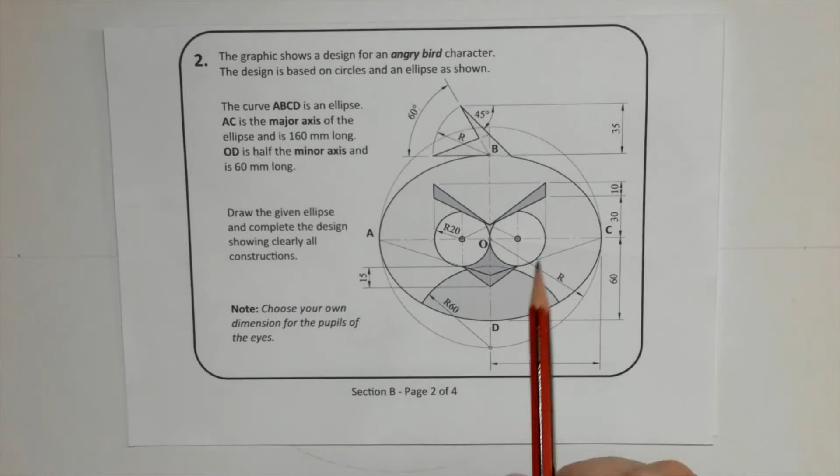It was a past exam question for the ordinary level junior cert, and it's an Angry Bird character. So already we have in this question 80 on the major axis. There we have 80 millimeters, and then 60 on the minor axis. So it's based on an ellipse. That's the way it's done.

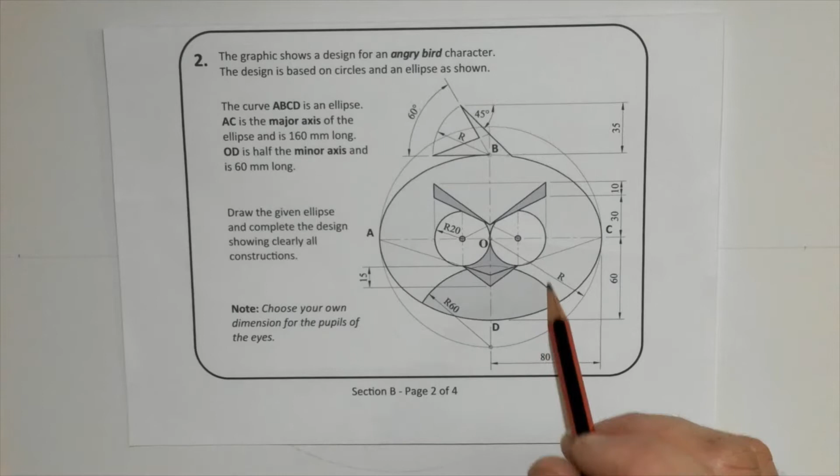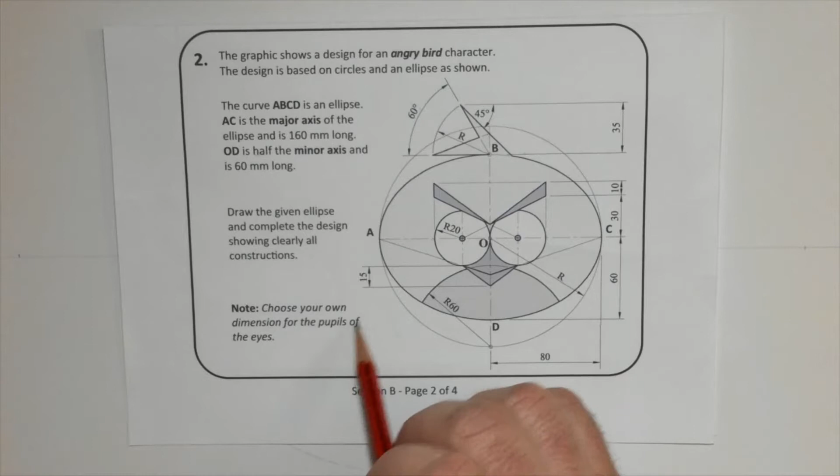There's an R60 curve here at the bottom of the ellipse. We have a 60-degree angle up here at the top and a 45-degree angle. And then it says here: draw the given ellipse and show clearly all the constructions. The pupils are your own choosing, so you can make these little circles whatever size you like. These other ones are R20, so they touch in the middle here.

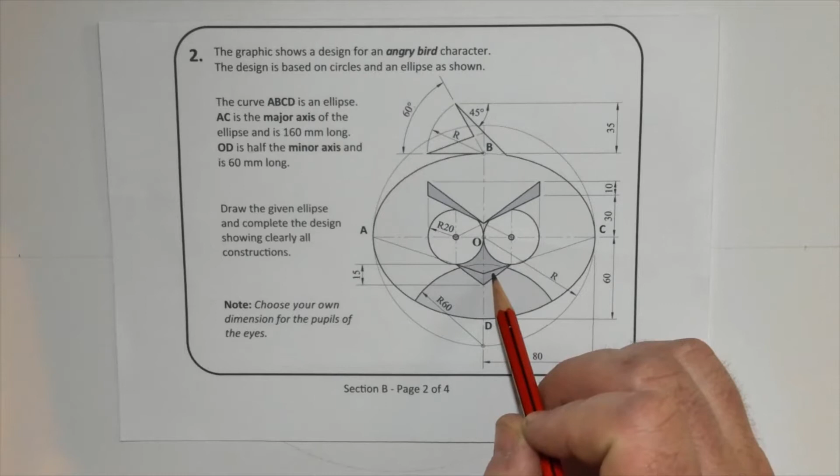But I was looking at this question. The tricky parts of this question are these two lines here. There's no dimensions on them. There's a 15 here. The 15 millimeters come from the bottom of that eye to that.

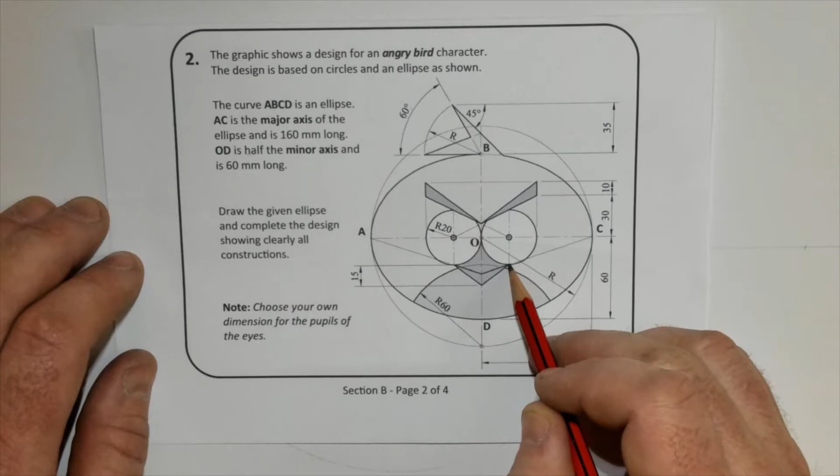So that's the 15 mil, but these ones here are a construction line which touches the outside of that circle, that cross point there, or that centre line. So it comes from there, bottom of that line restrains it, and it just touches here in the middle.

So we get going with this. With those two circles already done, we have a major circle from there to there, and then the minor circle is the inside one. So then we can just divide it up, same as normal, with the 30 and 60 degree set square.

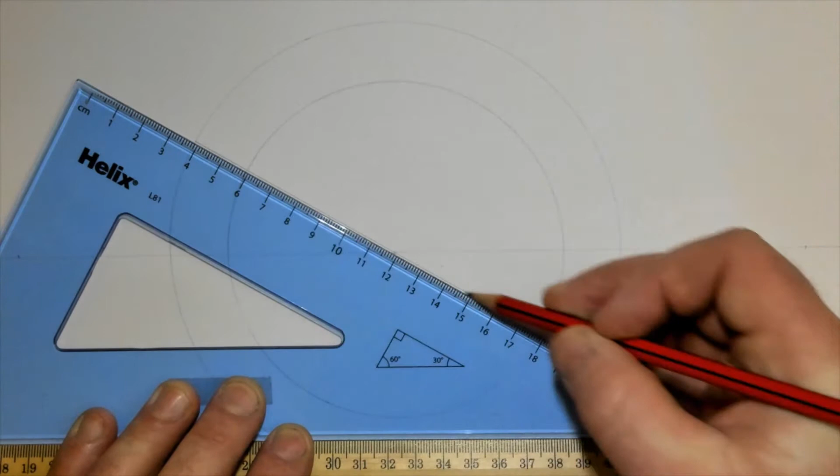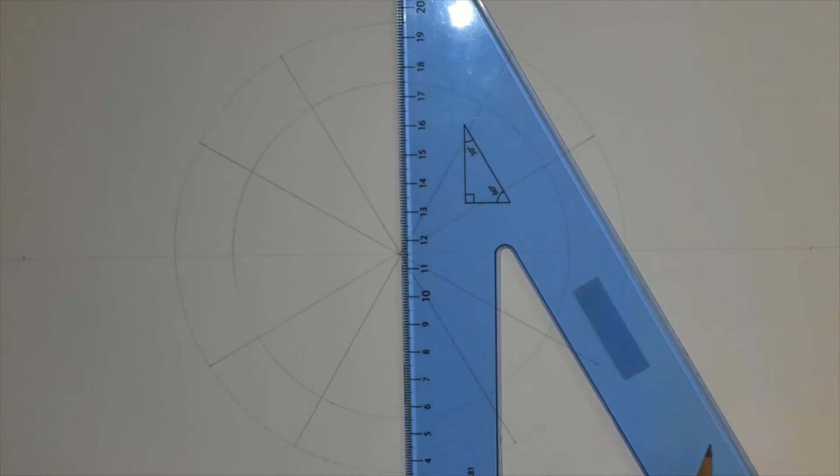So I'll do it a bit heavier here so you can see it. You don't need to go this heavy when you are doing it, just leave it a bit lighter. This is just so you can see what's going on through the camera. That line there can be maybe dotted, just stop and start it.

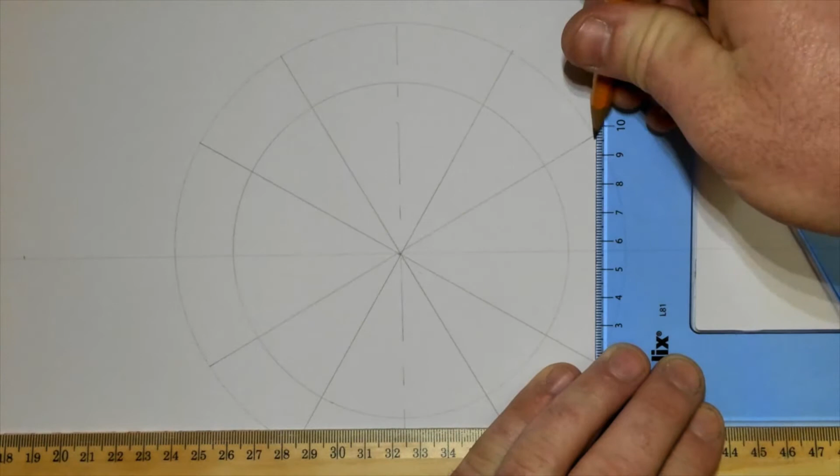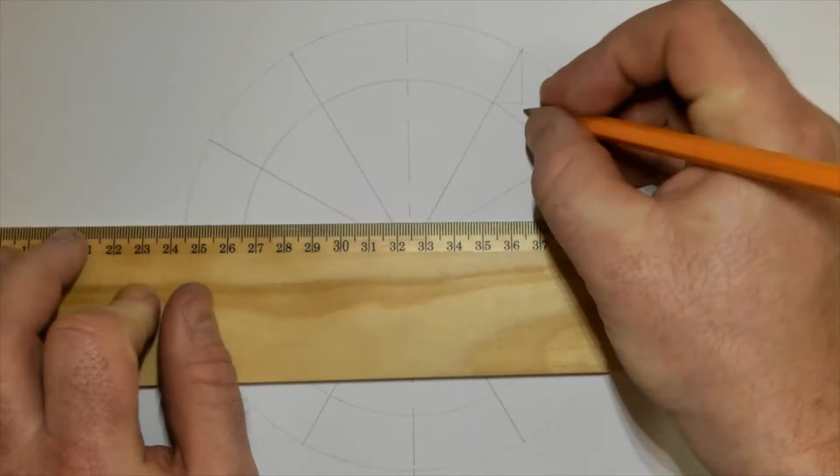Right. Then as normal, we come down from the major and come up from the minor to bring our point. So we'll just put the minor on. That's one point. We already have a point starting here, so we can start there. Down from the major again. Up from the minor. Another point here on the minor circle.

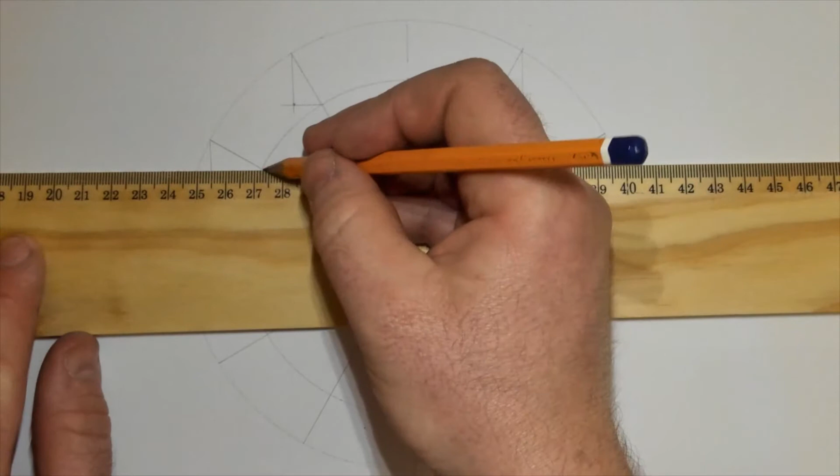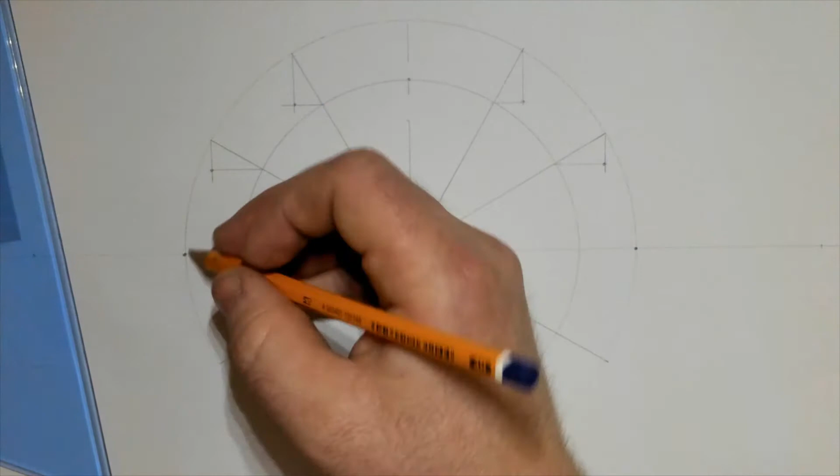Another point. Another one here, and then we have another one here. Now it doesn't really matter how many segments you break this up into. You could go with another one here if you wanted, say some other angle, but it's just a guide. When you're trying to sketch this along, sometimes it can be hard enough to get between the points.

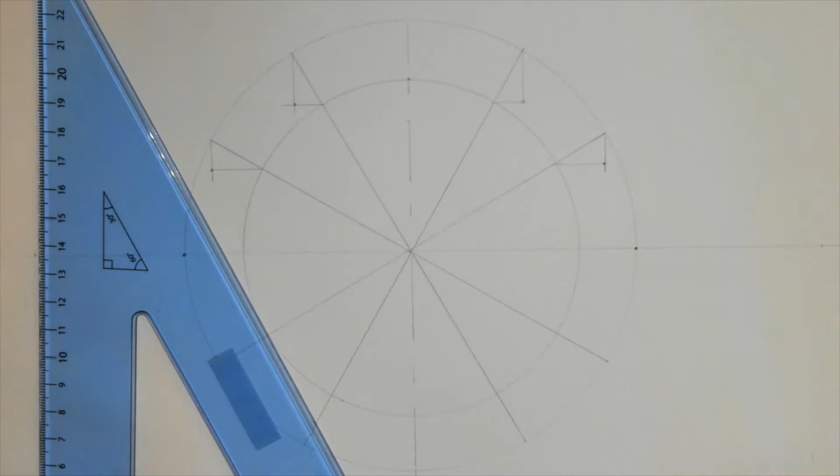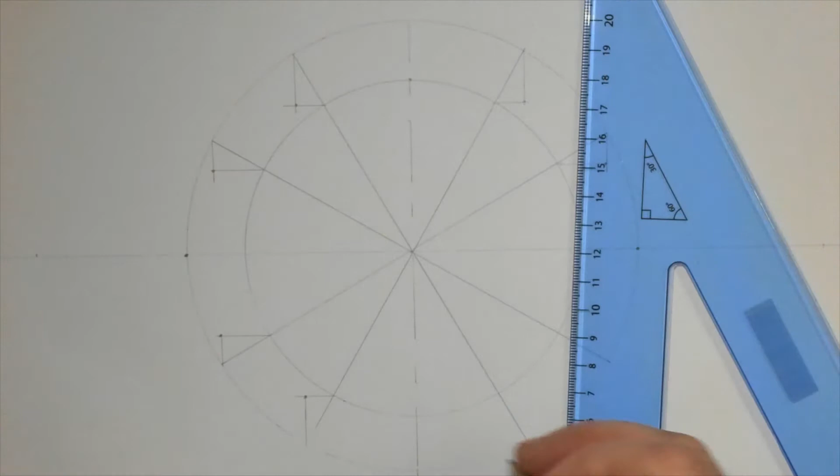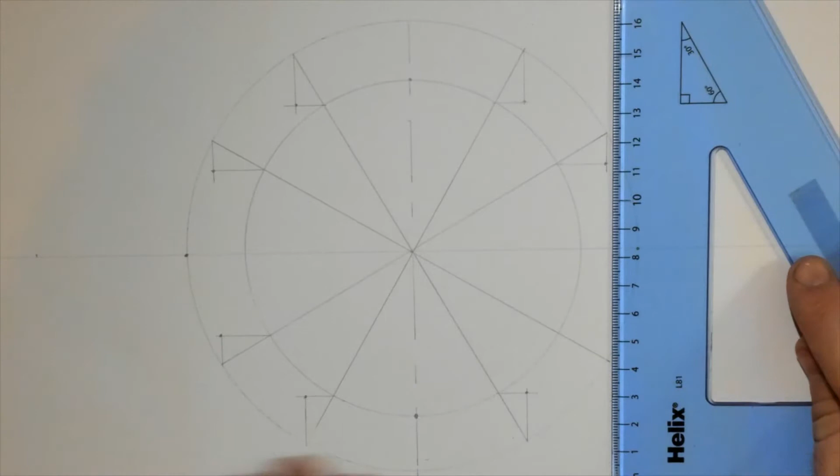So then we'll move it on here. A point there. I'm just going around there. Right there. Hold on for a second. Go there. And the point there, that's on the minor circle. Along here. Along here.

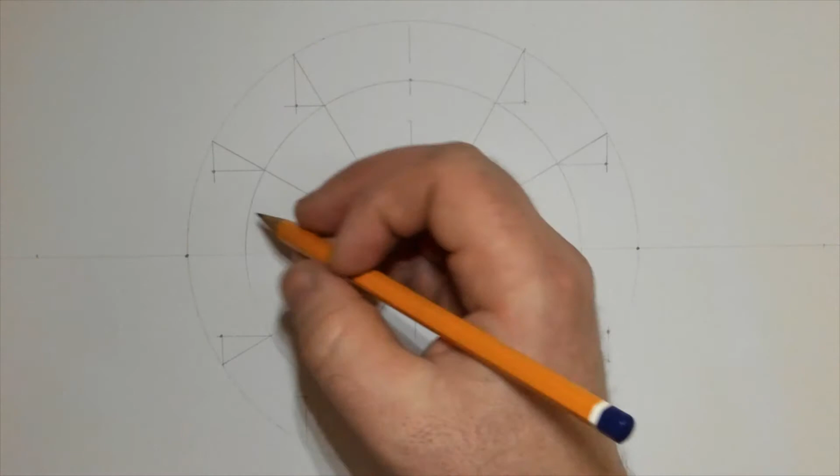So you can sketch through this, and just a tip for when you're sketching these: sometimes you're better off keeping your hand inside the curve when you're doing it. So I'll just start this off here and show you the strategy. Just kind of feather it in like that. Don't put too much pressure on the pencil for the minute.

What I'm using here is a 4H pencil. That can be better for you. If you use a 2H to start off with and you make a mistake, it can be harder to rub it out. So I'm just feathering between the points here, and then it can be heavied after. So I'll stop the video for a second and resume it when I've sketched it out.

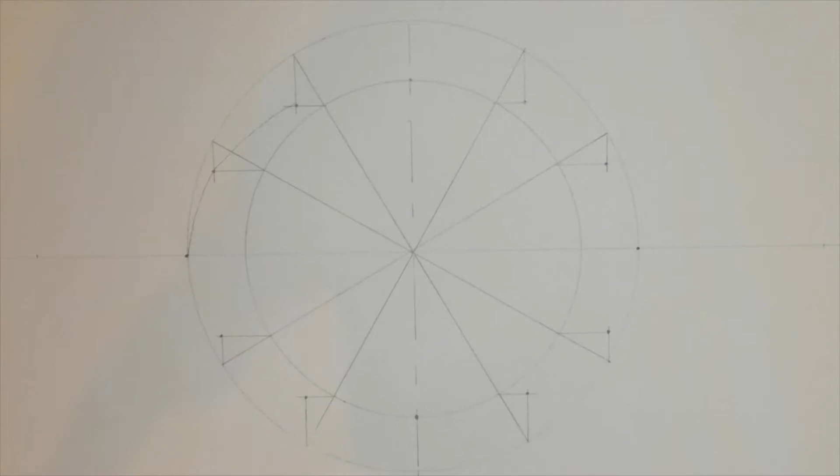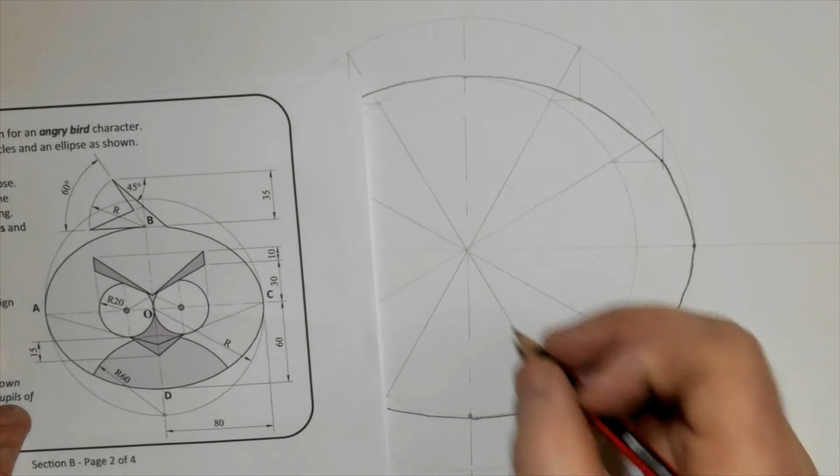So I'm just resuming the recording now. That's the ellipse, we have it sketched out there. So the next part asks us to put in these two circles. They touch at point O in the middle there. This is point O, right in the centre.

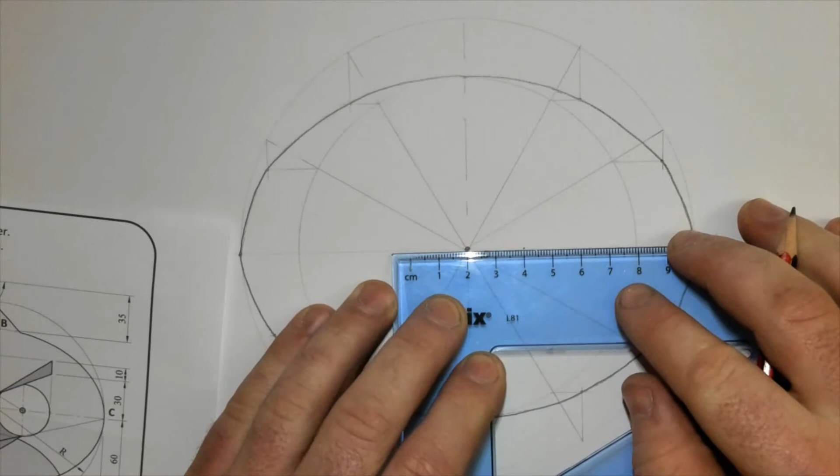They touch there, so we start out by moving out 20 from the centre to get the centre of our circles. So go 20 from the centre, and that's the other 20. So then I set up my compass here to 20. Bring it in.

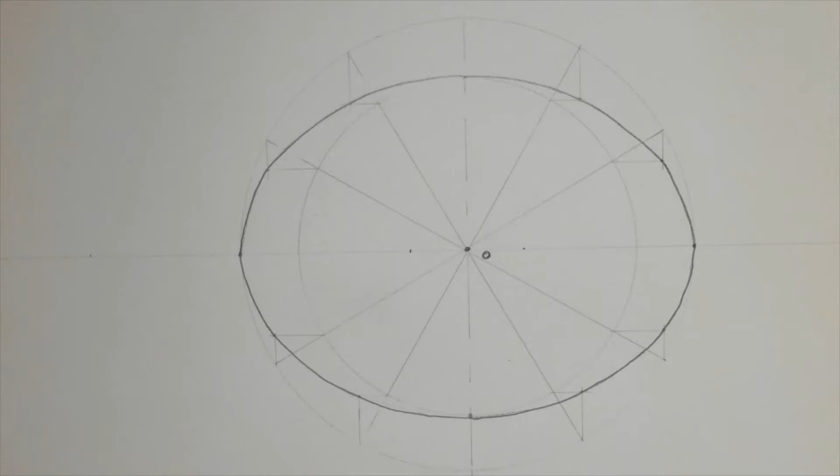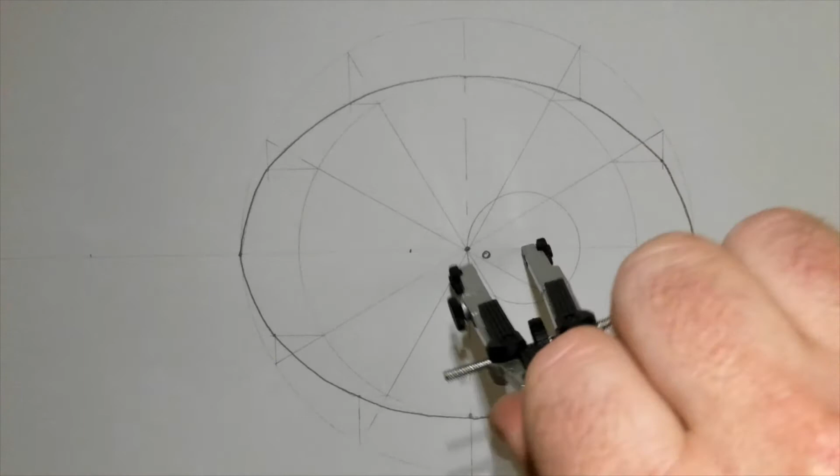Just using the compass to make sure there's plenty of pressure on that part of it particularly, and less pressure then on the lead part. They don't have to be as heavy as this when you're doing it. I'm just doing it heavier so you can see. So then this is our radius 20 here.

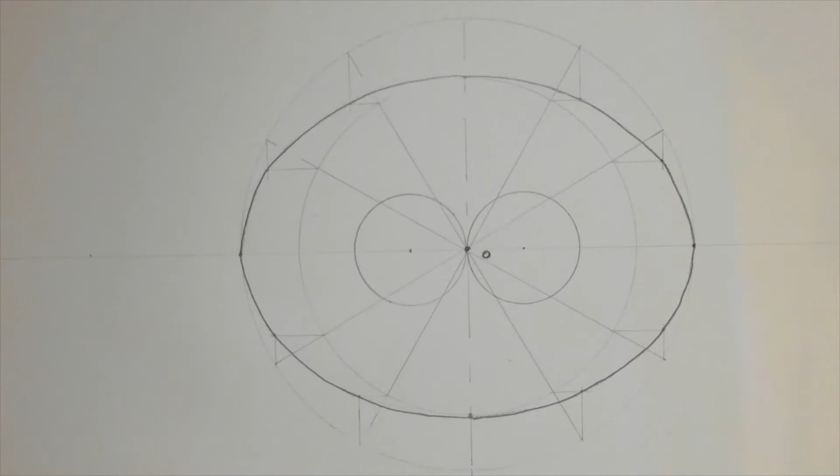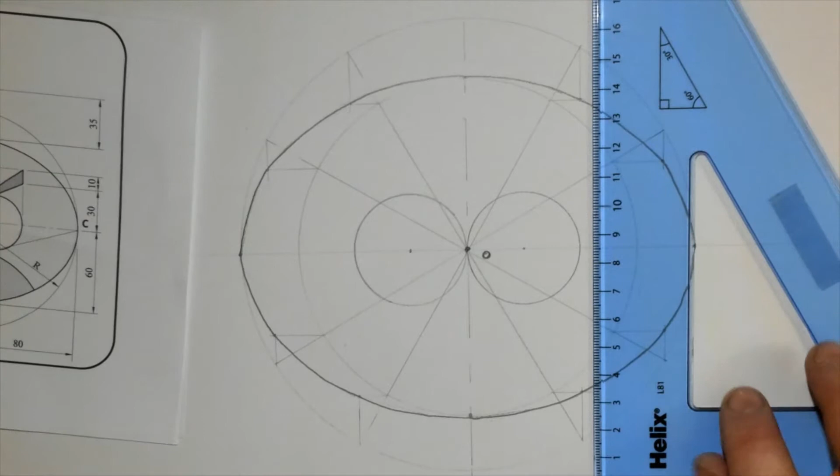And there's two there now. So let me look at this again. What we have here is these two construction lines, so we can make these eyebrow shapes here. There's two construction lines coming from the side of the eyes, first of all anyway. And go back to the 4H pencil here again. Just bring up two construction lines, very light, on either side.

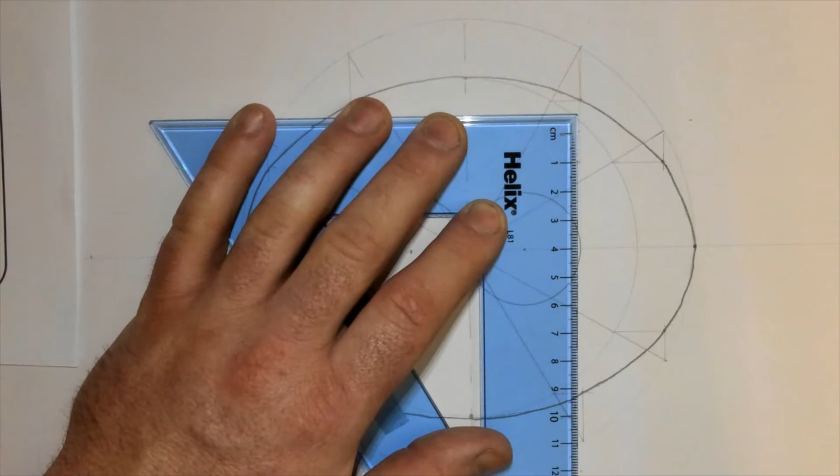And then on those lines then, we can come up 30. So 30, and then 10, and that can be heavied in there. It's 10, 20, 30, and then I'm heavying in this piece. Same on the far side. 10, 20, 30, heavying in that part.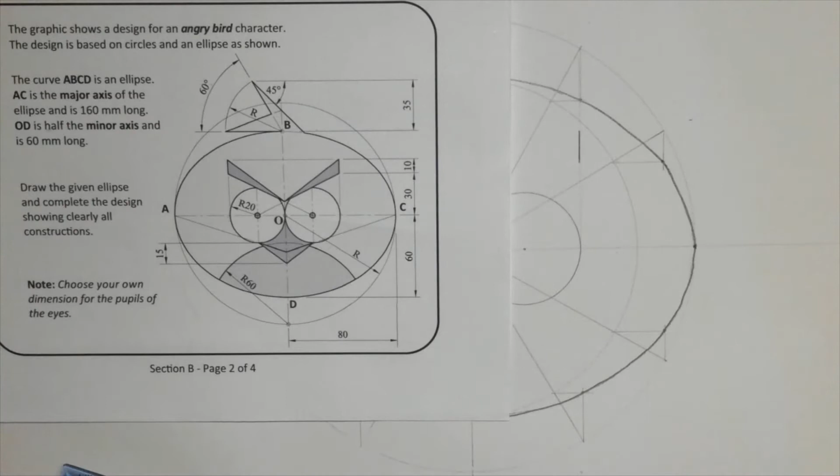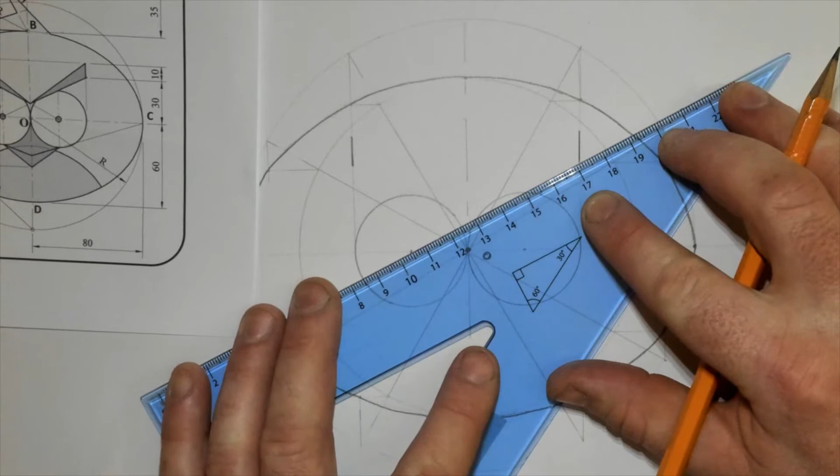And if you look closely at this, from the point at 30 there's a line and it crosses through the centre of that eye there. So it crosses through there, but it's only a construction line, so you have to be very careful there. So just put a light line then from the point that we marked up 30 here, and just a light line to there to start with anyway. And the other one's the same on the other side, but it's crossing through the other eye. So that's it there. We can heavy it in after, I wouldn't worry about that for a second.

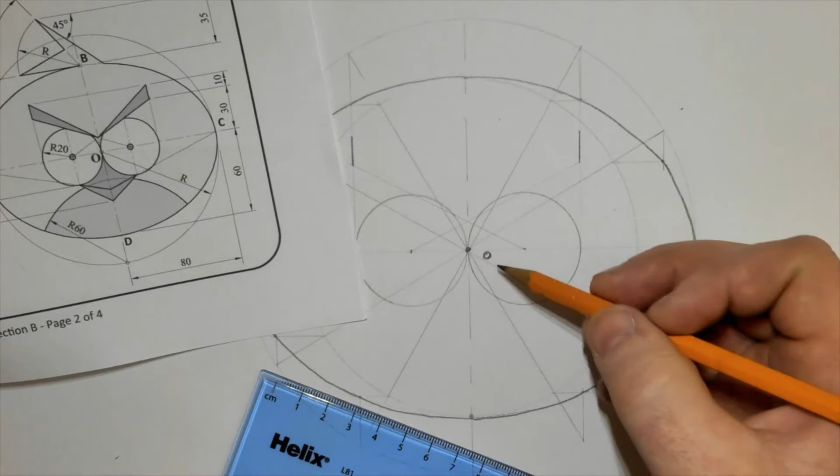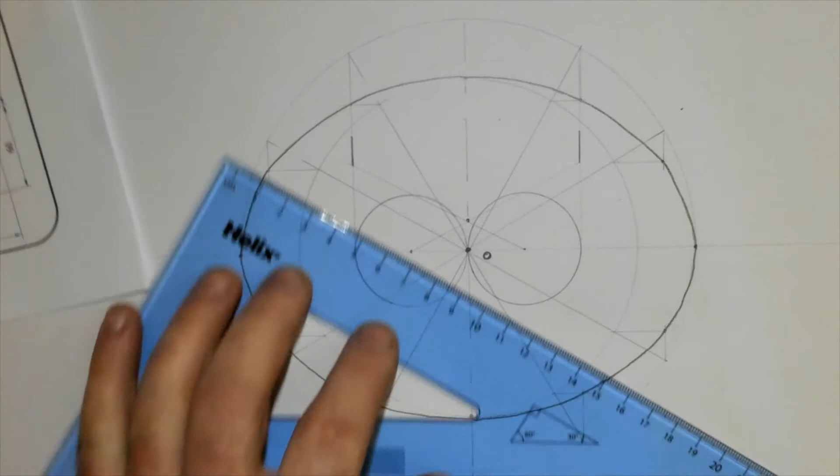Now there's a lot of lines here going on, but when we have them in, you'll see it. So then from there, it's all meeting at a point. And that's the point there we're talking about: the intersection of the centre line and the lines coming from each edge through these centre points of circles. So it's right there, that's the point we're heading for. So what we can do is use the 4H pencil again to put a heavy line in there. So that's one eyebrow on this side. And then the other one on the far side.

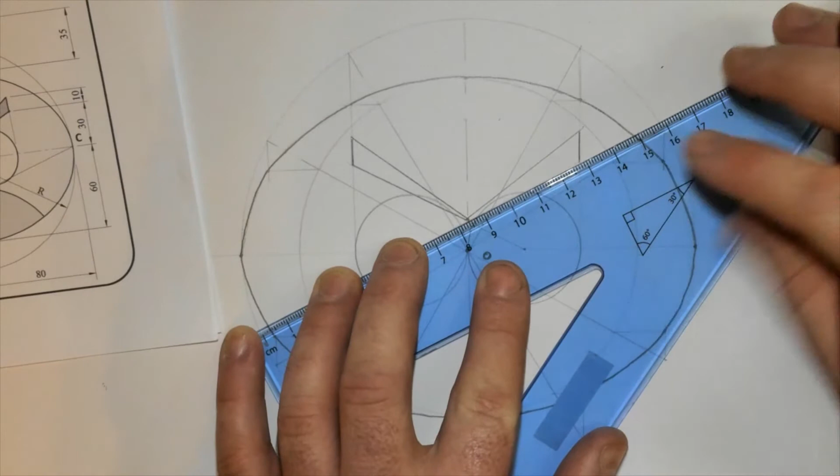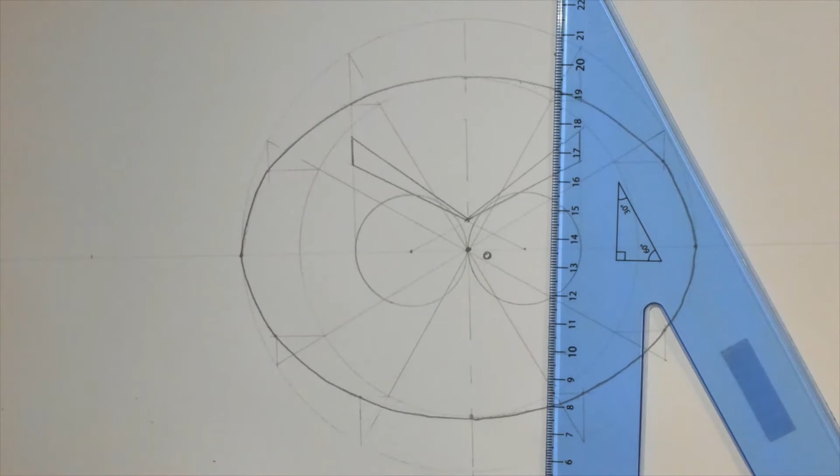So the only real trick to that is where there's a construction line and it passes right to the centre there. It's a very light construction line, but that's the bones of it there anyway. So then we go along and we look at these. I was telling you earlier on about this part here being a little bit awkward, so we can start that first. I'll have to put the centre lines on these smaller circles now first too. So just a long line and a dash, long line and a dash.

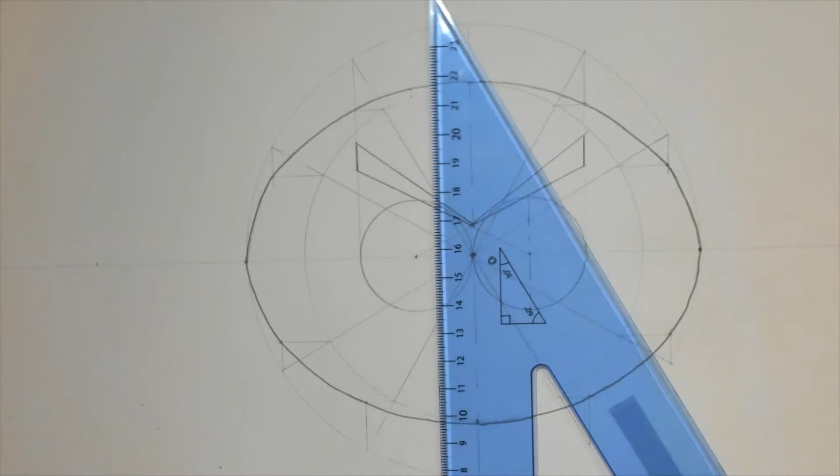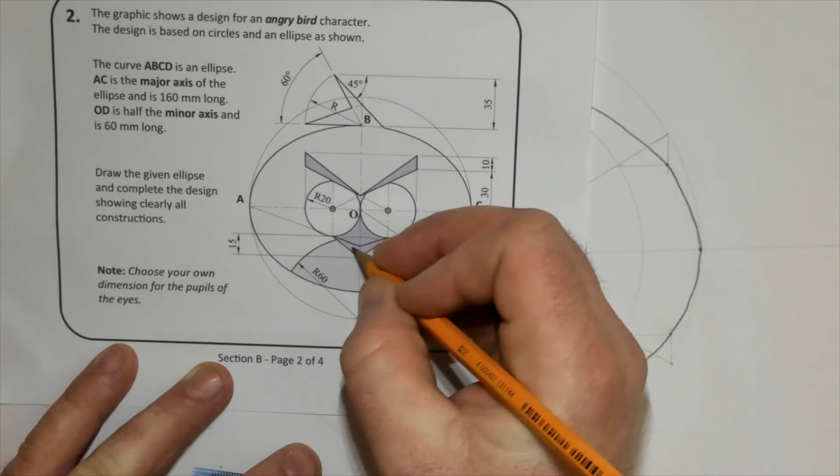Now there are actually standards for how long the lines and the dashes are, but that's for another day anyway. We'll think about that on another occasion. By standard I just mean there's a set distance that these are meant to be, but don't worry about that at the minute. So then what we have is from point C to this point, and from point A to this point. We can go with light lines then.

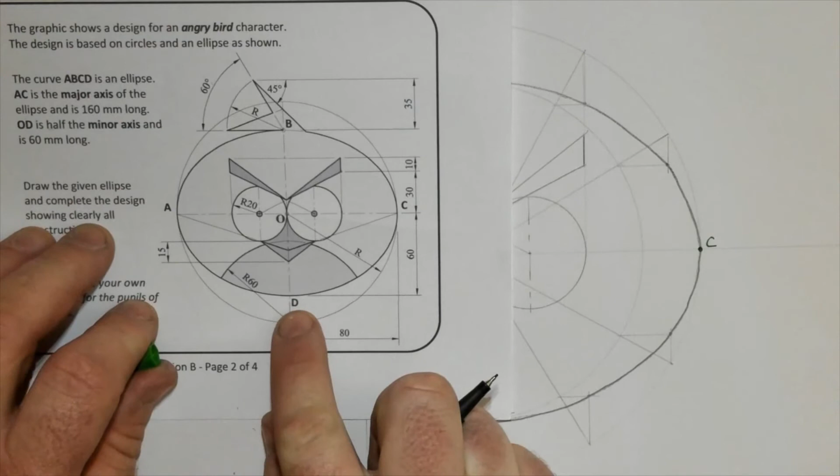So what I'll do is I'll label them just so that we know what we're dealing with. So point C is here, right there, and point A is here. It's no harm just to label everything because it leaves it easier in the long run. And point D is here. That's point D. Point B is at the top.

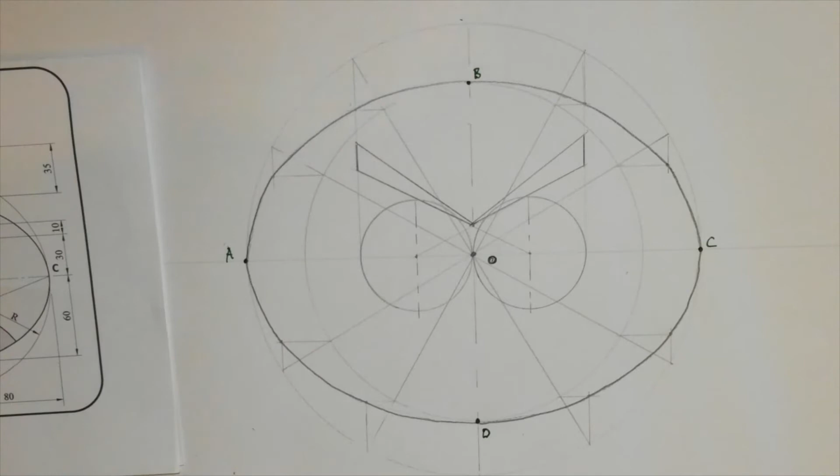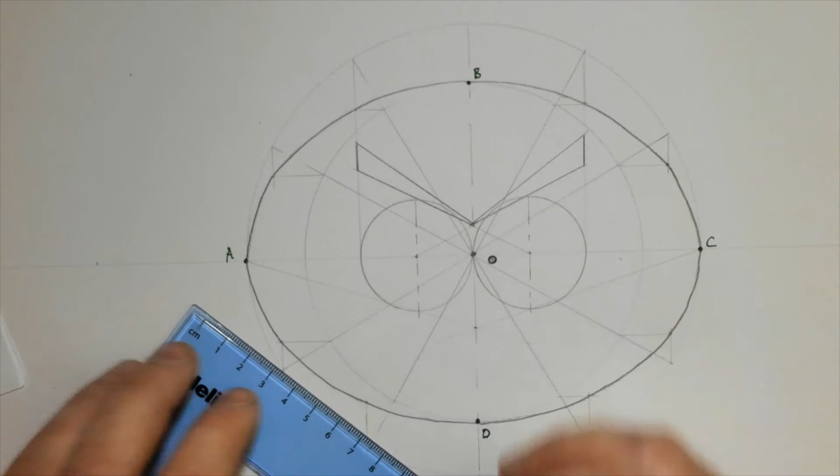So then what we can do is we can get a construction line from C passing through that bottom point there, because that's how it's drawn. So we just go with a construction line there. Light again. Same the far side. There's an intersection point again there. What we can do then is heavy in from here to the centre. That gives us the top of the beak. In essence, that's what we have there.

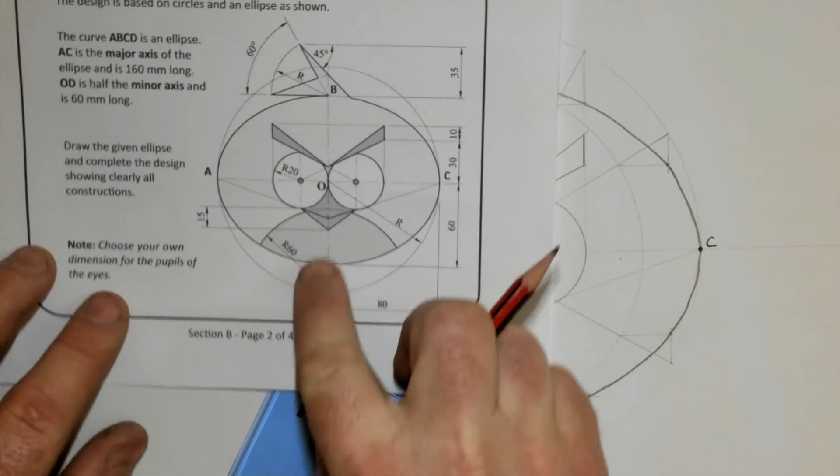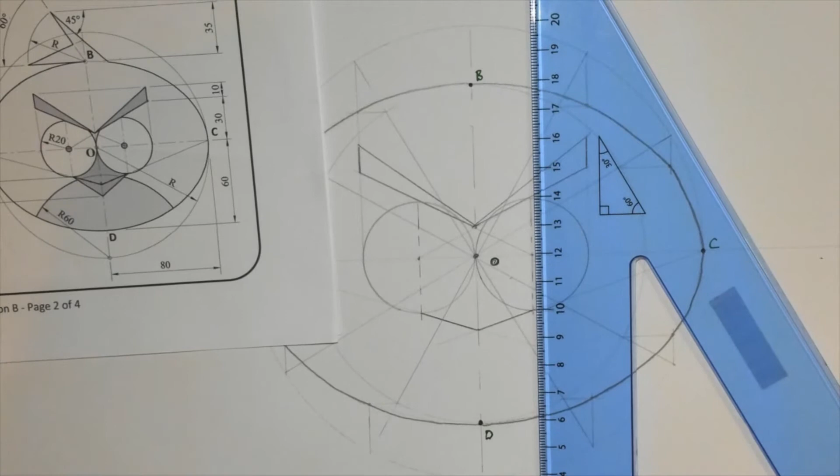Right. So that's the upper part of the beak. So the lower part of it is here. So what we can do is measure down 15 from the bottom of the eye. Down 15. I'm restricted for space here, so I'm starting at the 100 mark. And 15 then. So 10, 15 is there. 10, 15, yeah. So going across there.

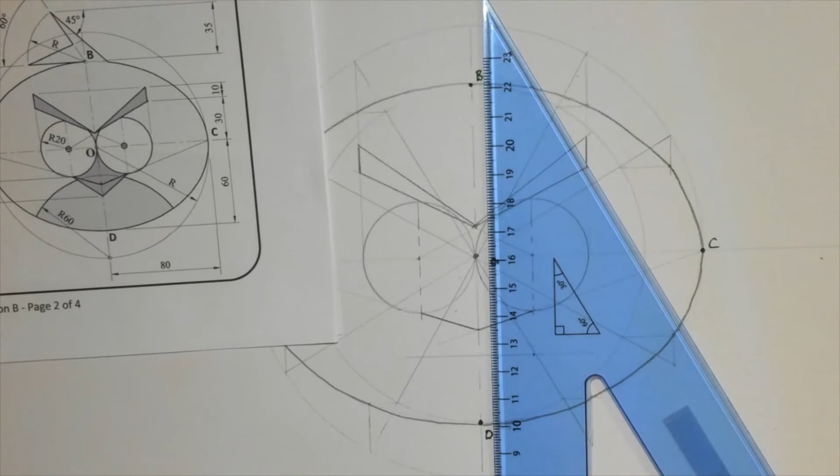It's 15 down. Then we already have our centre line there, and now we have a point to work with. That's the point there. So we're down 15. And we can work from there to that point. That's to be completed then.

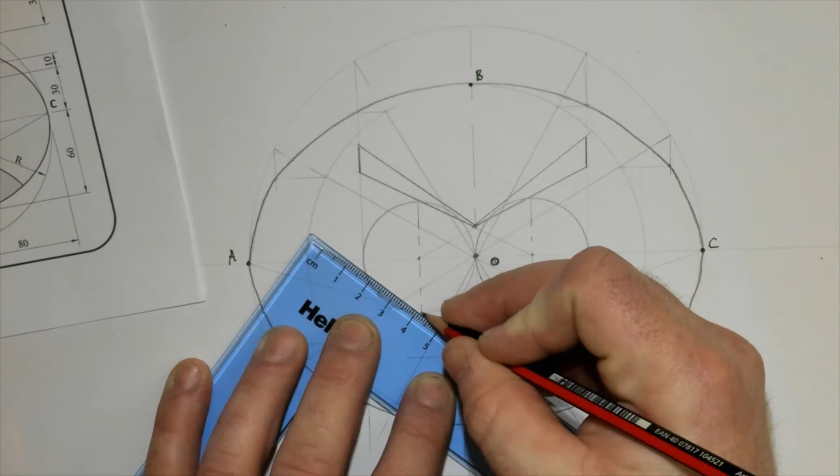Right, so that's it there. The next bit we can work on is this R60 curve here. Now that curve stops on the ellipse on both sides, but it starts on the minor circle here at the bottom. So that's point D there, and starting on that point. So we get our compass, and then we say R60.

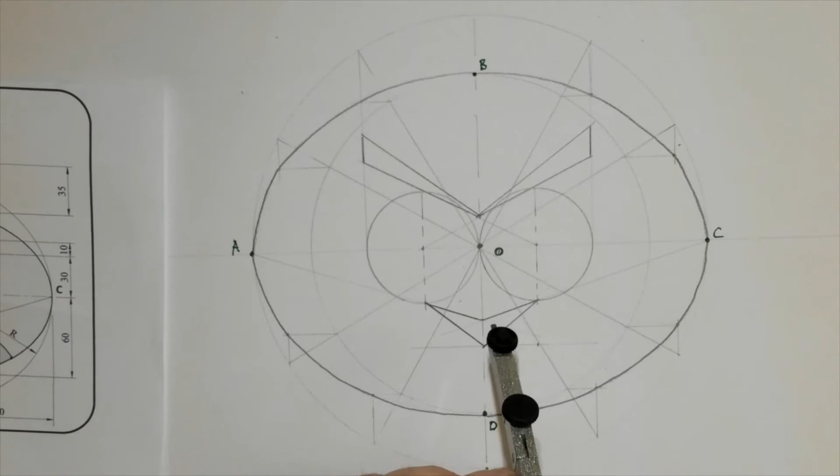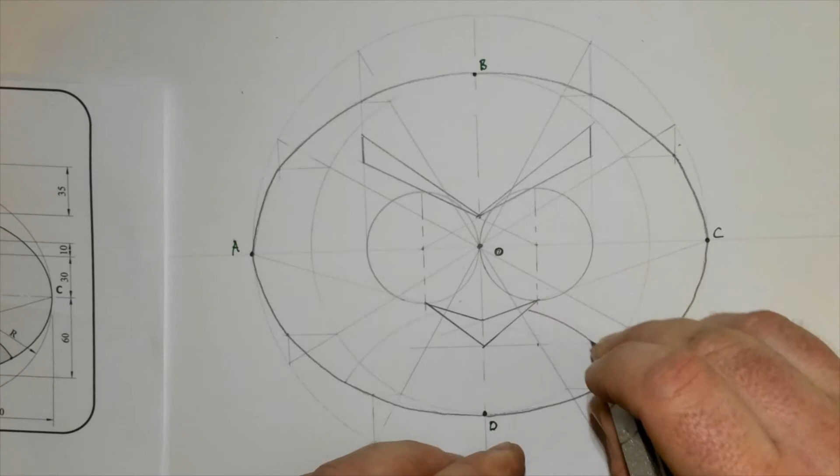There, right. So here, just leave it light. It's heavy from there to the point on the ellipse on both sides. So I wouldn't put it heavy through the beak. Just put it light first and then retrace again. So light first like that, and then put a bit more emphasis on it. So it will stand out because that's the line you want to actually emphasize there. That's the R60 curve finished.

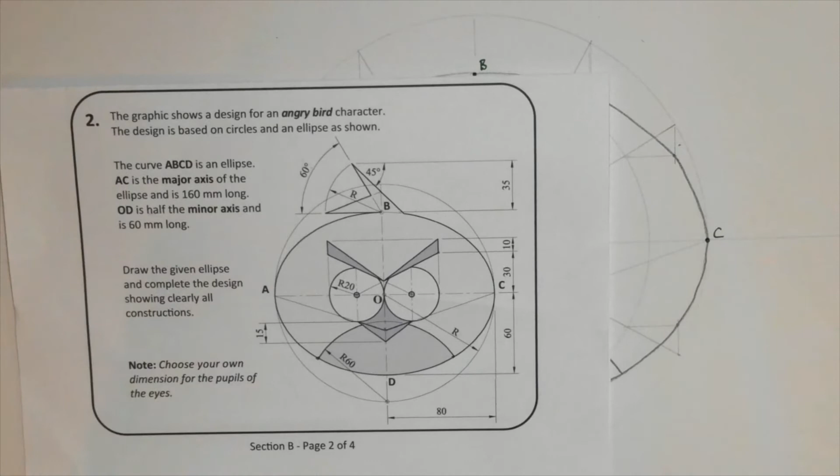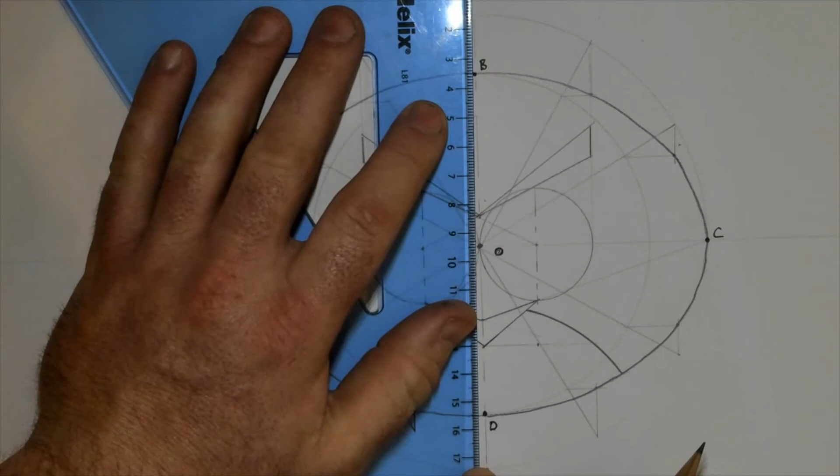Then at the top, you have to look very closely at this because there's a bit of a trick here as well. I'll show you as we walk through it anyway. The first thing you can do is there's a 60-degree angle here. So we come up 35 and then we'll have a point. So, 35. What I'm going to do is just bring the construction line across there, light line. So that's 35 up from the edge to the top of the ellipse. There, right?

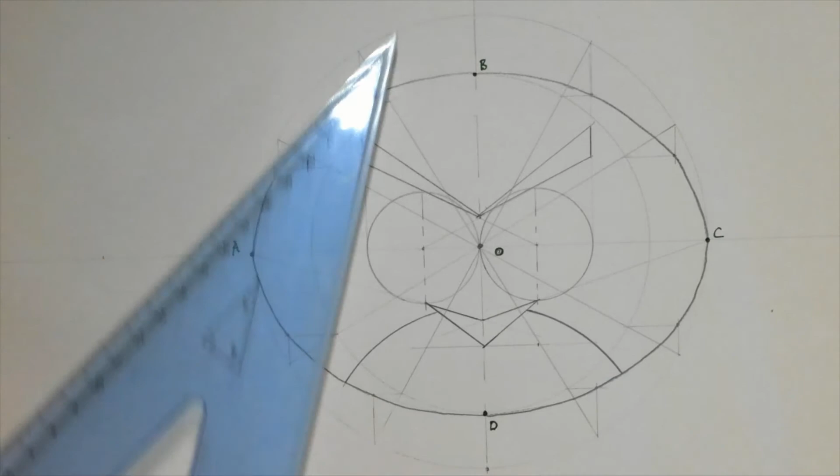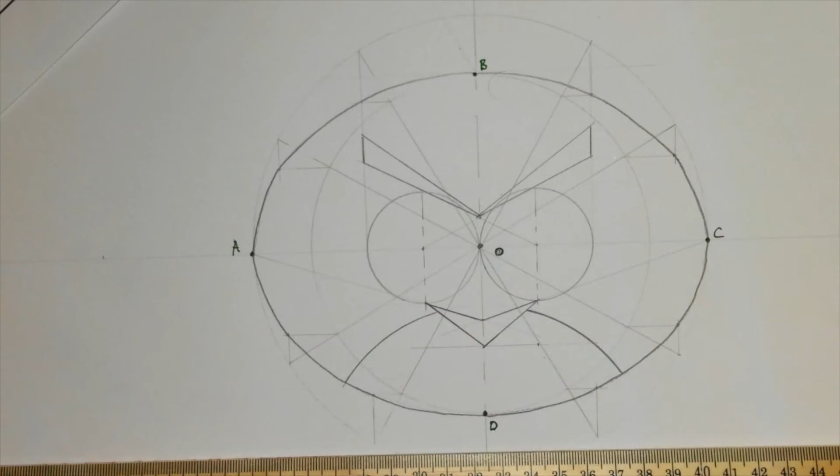Then there's a 60-degree line. Now that can be done light as well. From here, light line. That's our 60-degree line, and then there's another light line coming over so far from here. So just a light line again, just leave it at that. And what we can do is then get our compass and its radius, whatever length that is. Now the thing is, I was looking at this, it's not actually radius 35. You might think it is, but just be very careful. Just take this as the radius. It's something less than 35. So we'll go from here.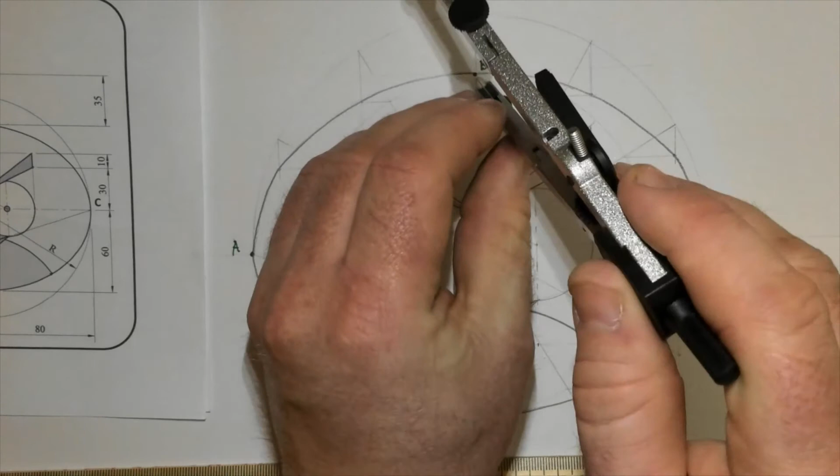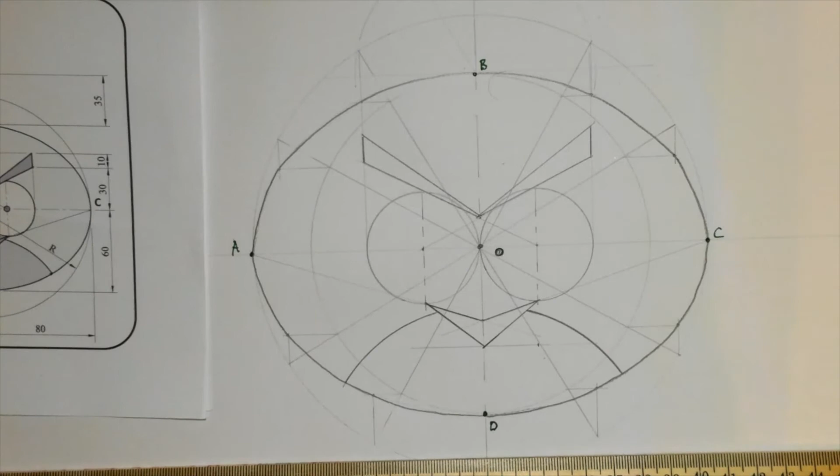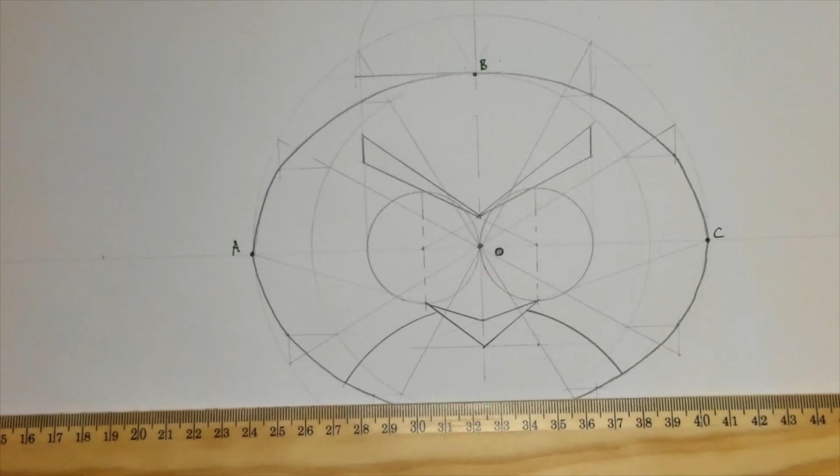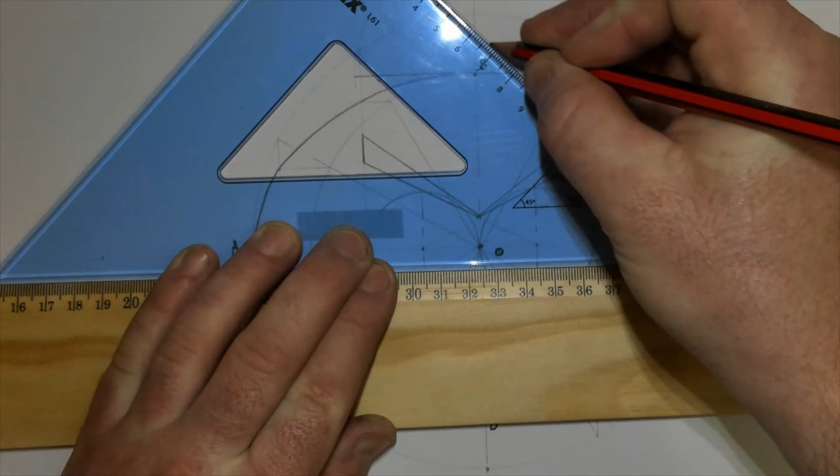Sorry, something greater than 35 it is actually, because it's a slight angle there. So just a light arc again, the whole way around. Doesn't matter if it's the whole way around or not. It's just a light outline to gauge where you're going. Something you can do is you can heavy then there over to where it hits the arc, because that is what we're dealing with here. And then we can bring the 45-degree line from that point back down to hit the horizontal line here. So 45 degrees, the line there, yeah.

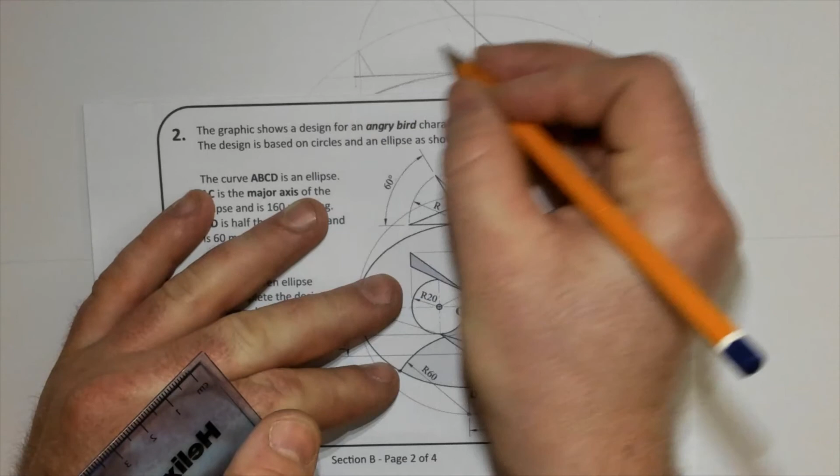And this is where the trick comes in now. There's a line that comes up from here, coming upwards, but it passes through this centre line here. Do you see this point? It's a construction line again, but it hits that 45-degree line, the centre line, and there's also construction lines. There's 3 lines meet at this particular point right there. So on our drawing, we look at it and we say, what are we talking about? So it's this, where the centre line comes up, the 45-degree angle is there, and our line has to meet on those 2 points right there.

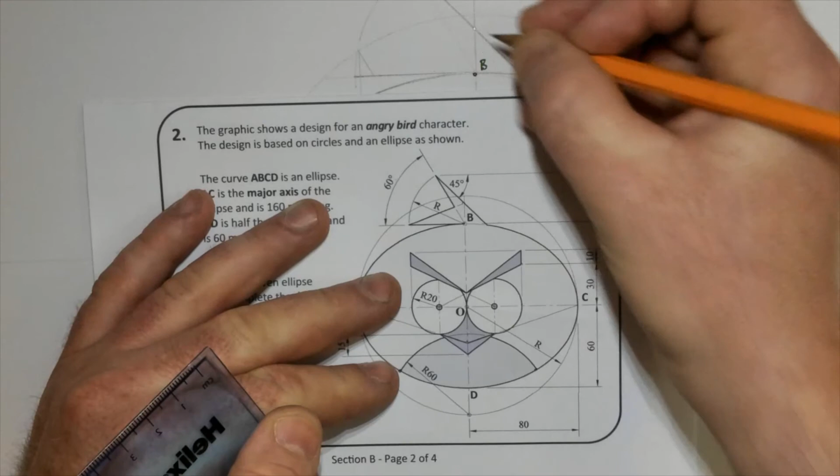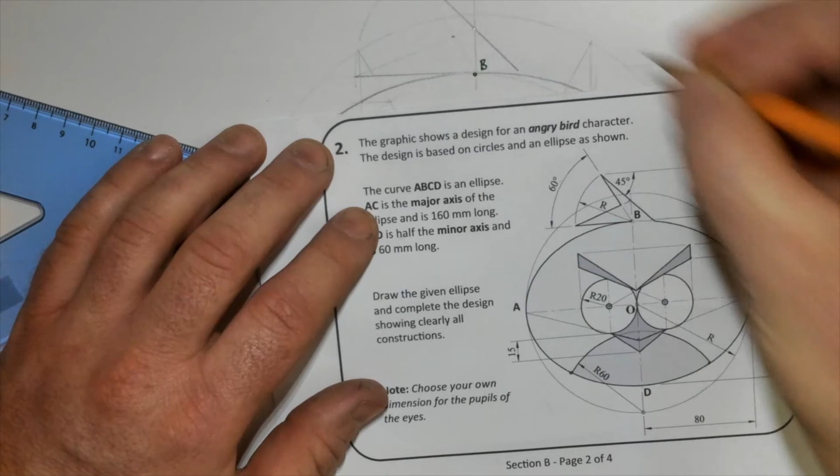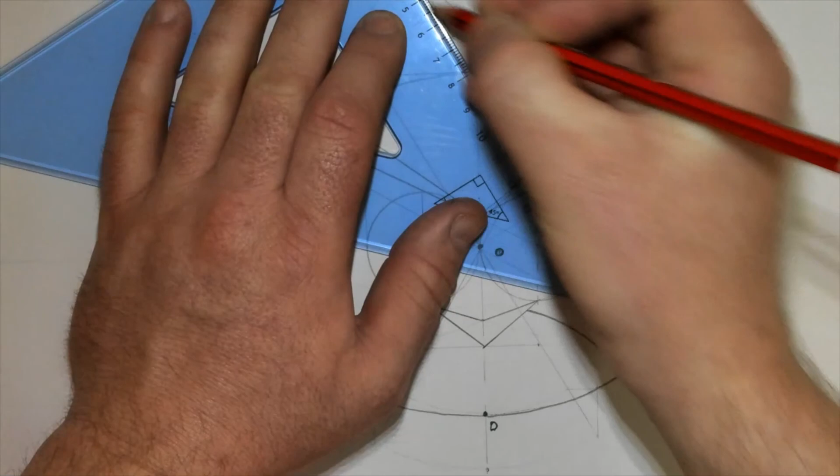It's not heavy the whole way either, so we'll just go light for a minute and we'll see then what the story is. Light for a minute. Right. Now, what we have now is an intersection point there. So that's our intersection point in our drawing. And anything after that is heavy, but it's light in the centre. Right. That's practically it now. What I was using for these eyes here was a very small circle.